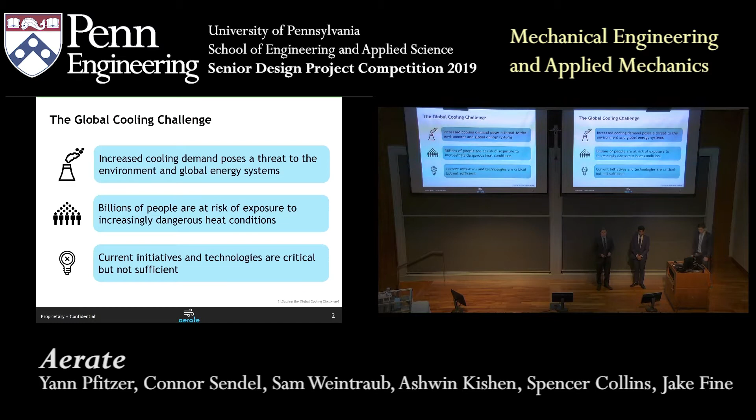Looking more specifically at the factors contributing to the increase in cooling demand, global temperatures across the world are rising, income is growing, urban populations are growing, populations in general are growing, and simply cooling requires a massive amount of energy.

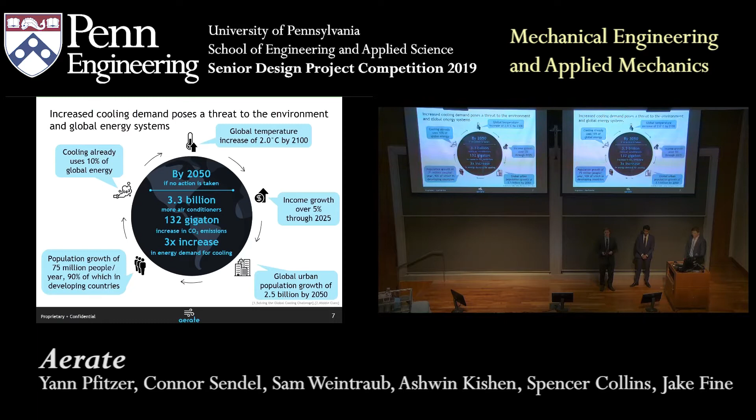What this means is if no action is taken by 2050, 3.3 billion new air conditioning units will produce an estimated 132 gigatons of CO2 emissions, resulting in a 3x increase in energy demand for cooling. To put this into perspective, this is the equivalent of adding 2 European Unions worth of energy consumption just to meet the increase in cooling demand.

This increase in cooling demand is happening in just a few countries, but the majority of growth is happening in India, which will see the introduction of 1 billion new air conditioners by 2050. Due to the massive growth potential, Aerate has decided to focus their efforts on this market.

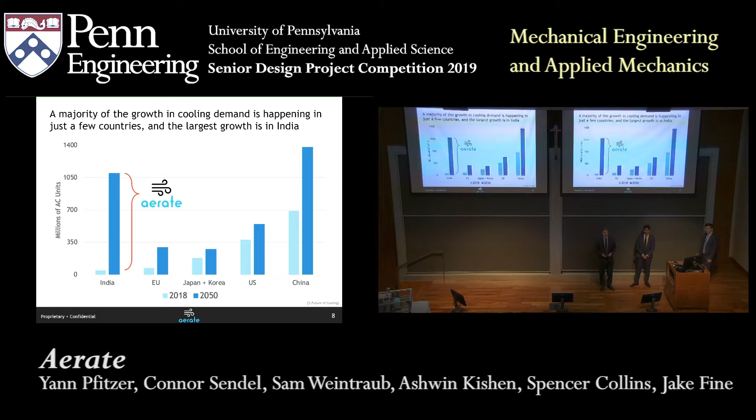Looking more specifically at the Indian market opportunity, currently only 7% of Indians own an air conditioner, but the ownership rate is rising annually. Additionally, 55 million Indians are entering the middle class each year, of which an air conditioner is a key quality of life purchase.

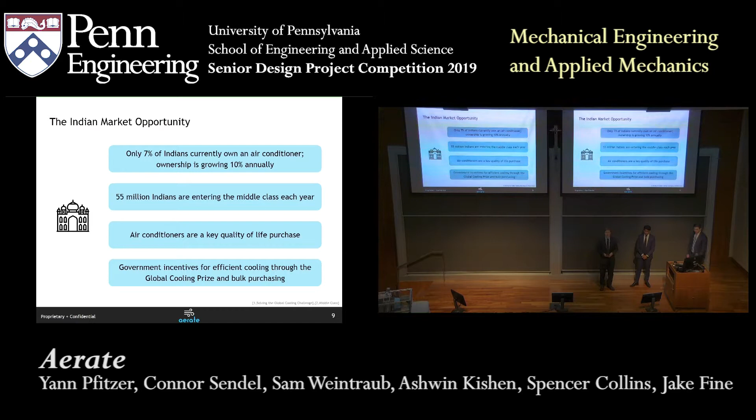Finally, the Indian government is beginning to incentivize the transition towards energy efficient cooling through bulk purchasing agreements and competitions such as the Global Cooling Prize. What this means is that in order to address the threat posed by the Global Cooling Challenge and reduce our energy consumption relative to today, a 5x increase in air conditioning efficiency is needed.

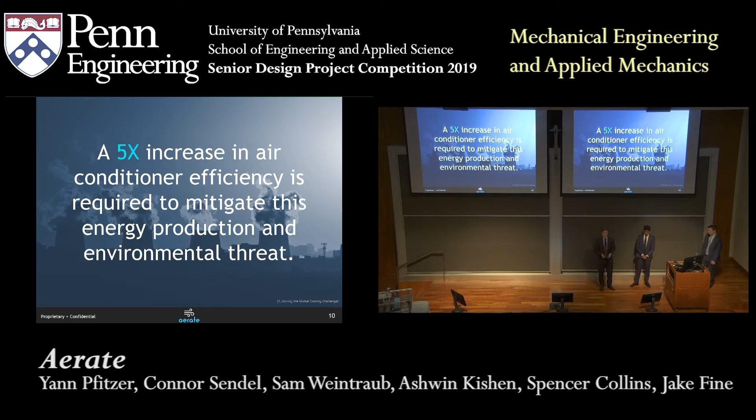The Global Cooling Prize is a competition sponsored by the Indian government and Richard Branson to promote the development of energy-efficient cooling technologies, and they have outlined a few key criteria. Performance, affordability, target output, and climate impact are all key considerations when developing a new air conditioning system.

Looking more specifically at the performance criterion, coefficient of performance, also known as COP, is a key metric used to evaluate the efficiency of an air conditioner. In order to address the global cooling challenge, we will need to achieve coefficients of performance greater than 5, compared to the current baseline of conventional air conditioners of approximately 1.06.

Now I'm going to hand it over to Ashwin, who's going to tell you a little bit more about how we're able to achieve this performance.

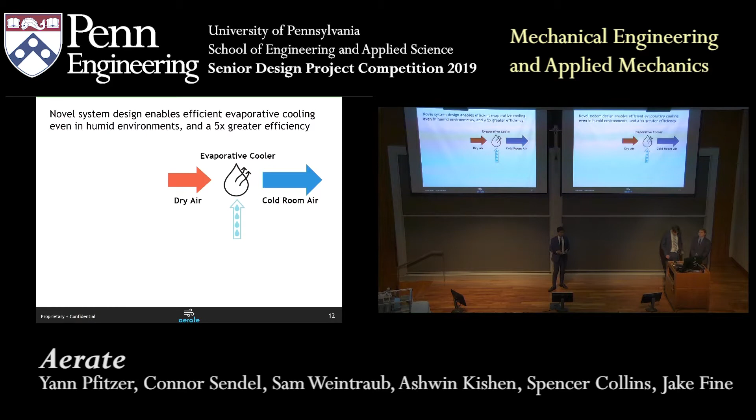Thank you, Sam. Evaporative cooling has been used around the world for thousands of years. It's a very simple and efficient technology. You evaporate a small amount of water into dry air, and this cools it down. Despite its efficiency, this process has an issue: it only works with dry air, which is no good for humid environments like India.

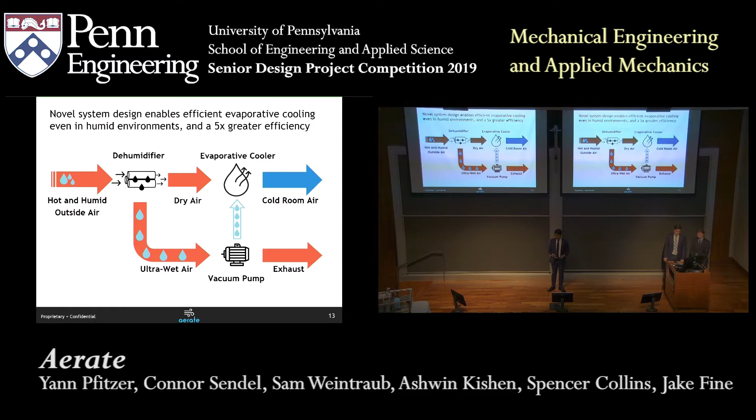Aerate introduces a novel membrane dehumidifier in front of our evaporative cooler. It's able to dehumidify air more efficiently than anything available on the market today, and thus we can cool anywhere. This is a system we have a patent application pending on.

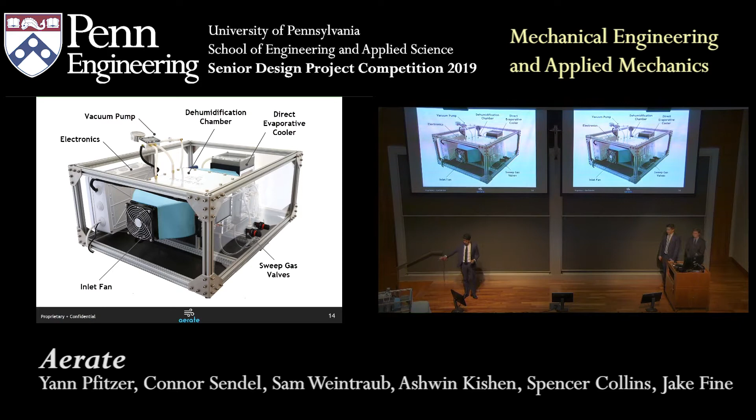So our real system actually looks pretty similar to what we have on the block diagram. You have a dehumidification chamber linked directly to our evaporative cooler, and this whole process is run by a vacuum pump. So we spent most of our engineering effort on the dehumidification chamber.

Basically, you take in hot and humid outside air and it passes across a membrane. This membrane is extremely permeable to water and selective against air. The process is driven by a vacuum pump that is literally sucking the water out of the air.

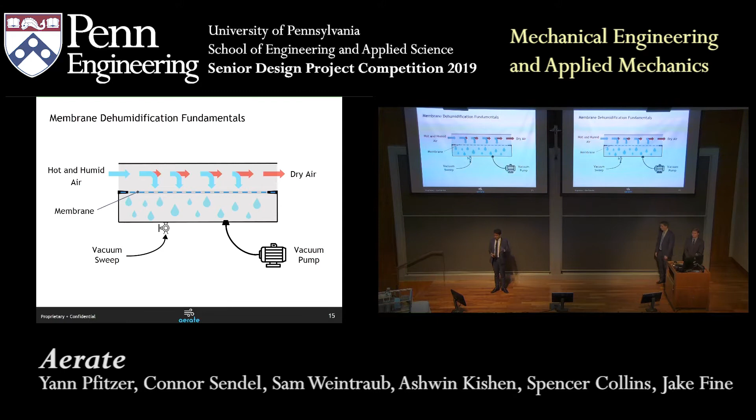To mechanically assist this process, we introduce a vacuum sweep gas. It's a small amount of outside air that is flowed into the vacuum to push the water out once it crosses the membrane. This process is well described by the solid diffusion separation model of membrane transport.

The flux of water across the membrane is proportional to a permeability coefficient and the difference in partial pressure across the membrane. So we took this equation and applied it in a few different lights.

From a thermodynamics lens, we characterized the vacuum work and potential efficiency gains of our system. From a fluid dynamics perspective, we characterized the sweep gas requirements and the residence time within the system. And from a membrane transport perspective, we characterized the actual selectivity and permeability of our real membranes.

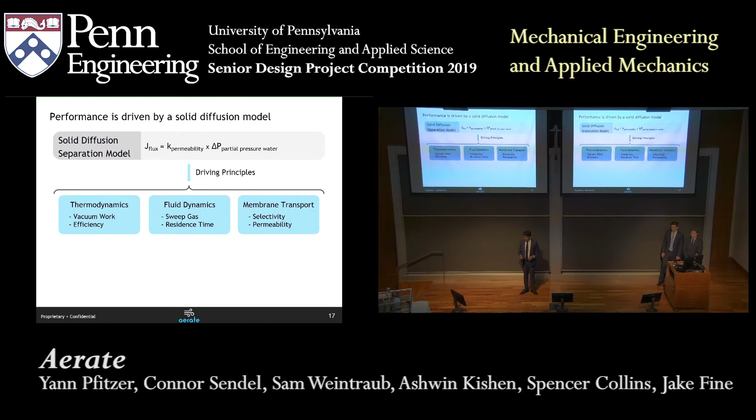We took those two characterizations and used them to try to get closer and closer to the theoretical efficiencies of our thermodynamics calculation. Based on this analysis, we identified a few trade-offs within our system, including dehumidification versus flow rate, and vacuum work versus sweep rate. An example of one of these trade-offs can be seen above.

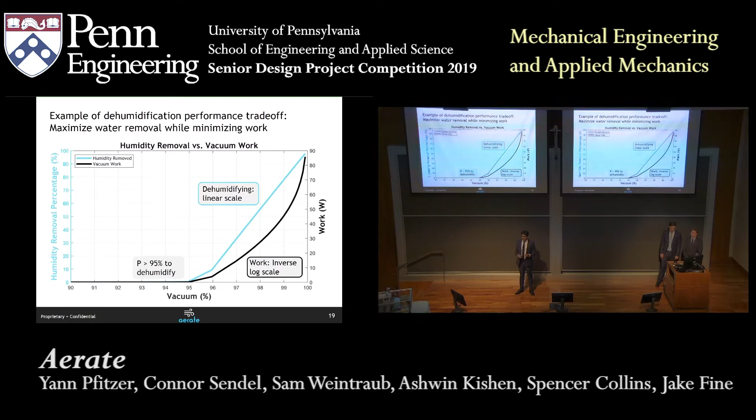So the percentage vacuum on the x-axis goes from 90 to 100%, 100% being full vacuum. On the left-hand side, you have the amount of humidity being removed, shown in blue, and this increases linearly after a minimum amount of 95% vacuum. However, the amount of work required to achieve that dehumidification, on the right-hand side, increases on an inverse log scale. So as you get more dehumidification, you're paying more and more work to achieve it, which is a trade-off for our system.

So we took our analysis and applied it to identifying the correct membrane material for us. We wanted high vapor permeability and high selectivity, which corresponds to the top right corner of the chart. We identified 3 membrane materials, Nafion, Pebax, and SPEEK, and tested 2 of them which are commercially available, identifying Nafion as the ideal material for us because of its extremely high selectivity.

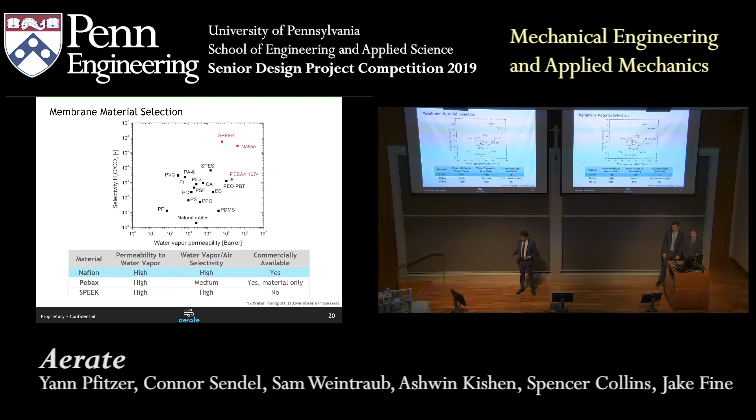Based on these designs, we came to the final membrane dehumidification chamber, and I'm going to talk about 4 different aspects of it today. Our system has a modular design with 5 identical stacked modules. Each module consists of a feed chamber and a vacuum chamber separated by a membrane. We use this design to ease manufacturability. Our system has 95 total parts, but only 11 unique ones between them, a very low number.

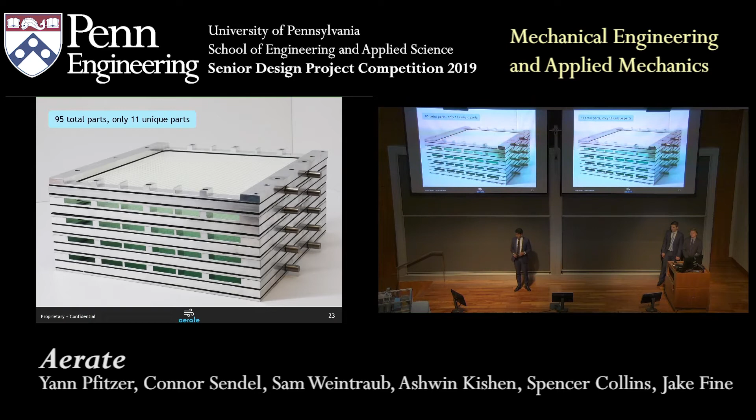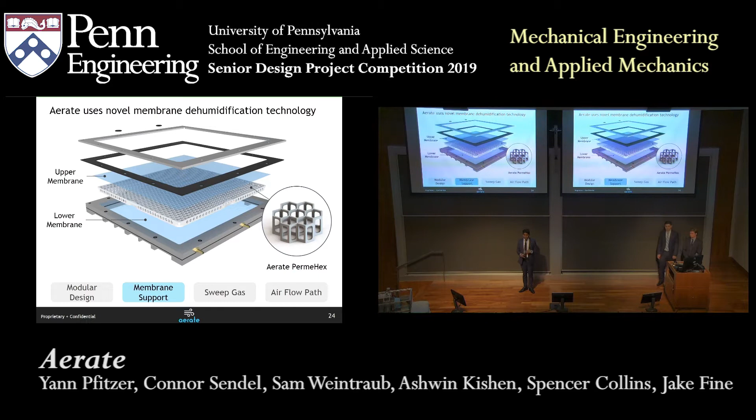Diving deeper into a single module, we have a membrane support, which is used to evenly support the membrane without pinching or puncturing. This required many iterations before we came to the Aerate PermeHex, a hex cell structure with openings in between to allow sweep gas and humidity to pass through the membrane and out through the vacuum pump. This is the membrane layer under vacuum, and you can see the hex structure actually at work.

Within our system, as mentioned before, sweep gas is extremely important. The way we're able to incorporate it is by using a manifold that introduces sweep gas into all the layers in parallel, which then passes across to the vacuum pump. This is important to shear the water off the membrane, because our system uses an interesting membrane that requires this component. It's extremely novel.

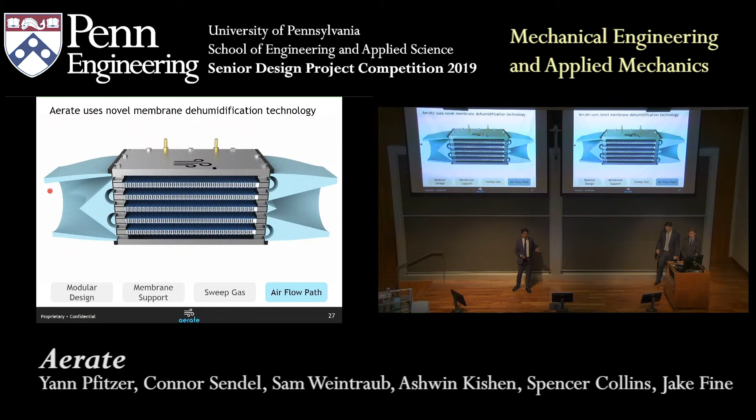Going back to the feed side, it's important to maximize the residence time on the feed side and to maximize the flow rate through the system, and these are actually in contradiction. The way we were able to optimize this was by creating an S-shaped flow path through the system, where each ounce of air is passed across multiple membrane layers.

Thank you. I'm going to hand it back to Connor to talk about the rest of our system.

Thanks, Ashwin. So of course we didn't get to this final design that you see in front of you overnight. It's actually the result of multiple iterations to characterize different items of our system. We started out with an extremely small prototype designed to characterize our membrane performance under vacuum and really understand what's happening with the membrane separation process that Ashwin described. Then we moved to a system that was about 20 times bigger in order to understand if our process would scale and test our manufacturing methods.

Finally, we moved on to the prototype you see in front of you, which was another 5 times bigger than that system and is ultimately about 2/3 the size of our target prototype. Now I'm going to spend a little bit of time talking about the performance of our system. Here you see a characteristic example of our system at work.

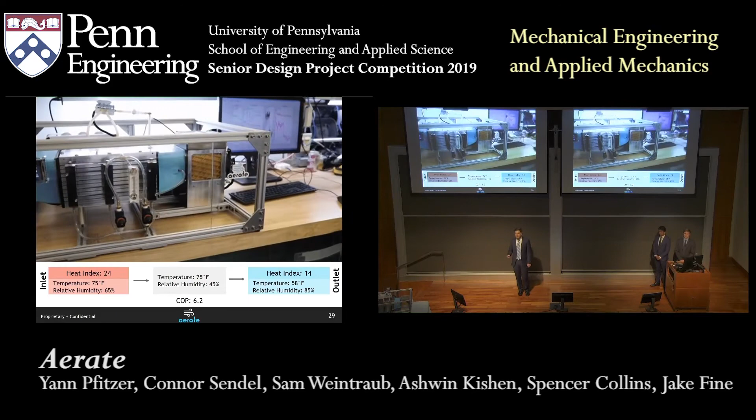Here we have air entering from our environmental chamber at 75 degrees Fahrenheit and 65% humidity. After the air exits the dehumidification chamber that Ashwin described, that drops down to 45% relative humidity, allowing us to cool it in the evaporative cooler all the way down to a chilly 58 degrees Fahrenheit. Overall, we see a move from a heat index of 24 all the way down to a heat index of 14, at an extremely efficient COP of 6.2, substantially higher than the baseline of 1.06 and our target of 5.1.

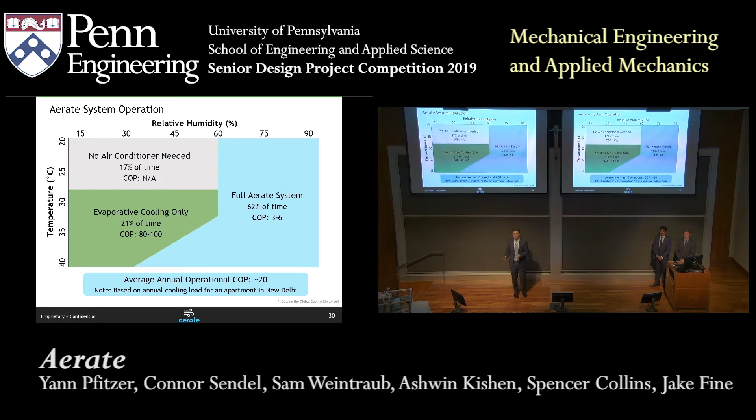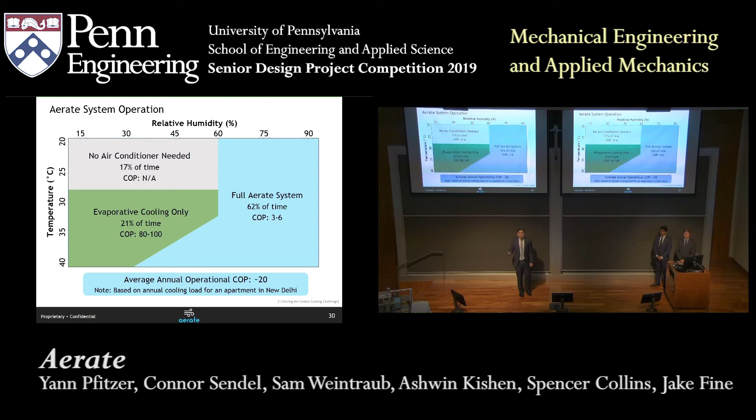But when we extrapolate these results to a full year of cooling demand, we see an even brighter picture. What you see here is a full year of cooling demand in our target market in New Delhi, India. Essentially, because of our system's unique ability to decouple dehumidification and cooling performance, when it's extremely hot but not very humid outside, we can take advantage of running only our evaporative cooler, achieving COPs of up to 100. That happens about 20% of the year. Taking this into account, over a full year, we expect an average annual operational COP of up to 20, almost 20 times higher than a baseline conventional air conditioner.

This also leads to substantial cost savings for users of Aerate, as the unit simply uses less power. Over our forecasted 10-year lifespan of an Aerate air conditioner, an average user can expect to save up to $1,000 in power costs relative to a conventional air conditioner, which is a massive value proposition.

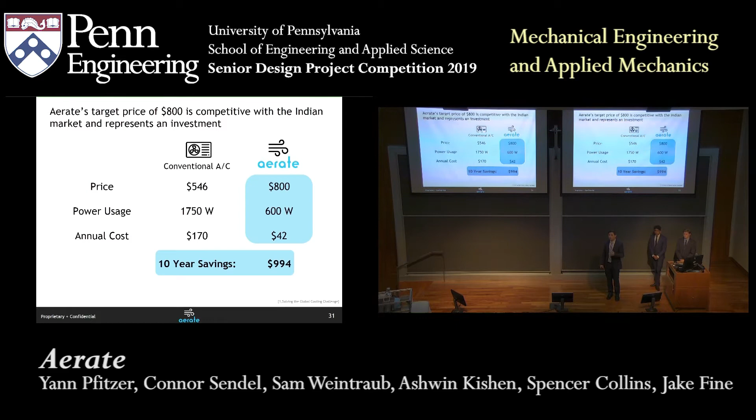Now, I've talked a lot about the great parts of Aerate, but we also have work cut out for us moving forward. There's two big things we want to focus on. First, we want to boost the flow rate through our system, allowing us to deliver more cooling performance and cool bigger spaces.

The second thing we want to do is decrease our sweep gas residence time. You could think of this as increasing the effectiveness of our sweep gas, the gas that's moving water out of the system. By decreasing the time any given molecule of sweep gas spends in the system, we can more efficiently carry that water vapor out, increasing the efficiency of our dehumidifier and of the system as a whole.

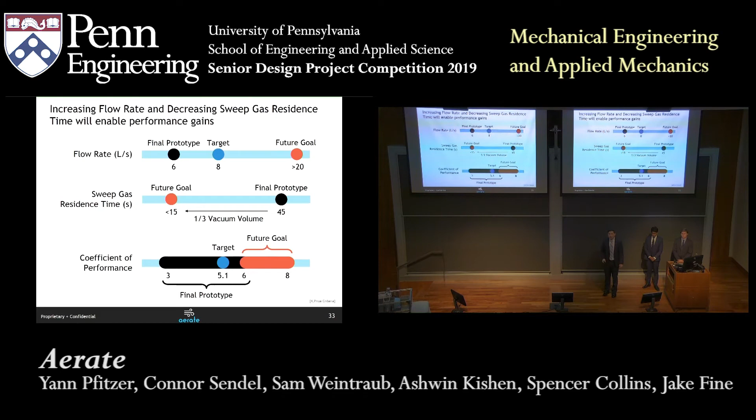We believe these changes will take us from our current operating regime of around a COP of 3 to 6, to an operating regime around 6 to 8, so that in any conditions we're exceeding our target COP of 5.1 when the full system is running, which will further boost the 20x gains we're seeing.

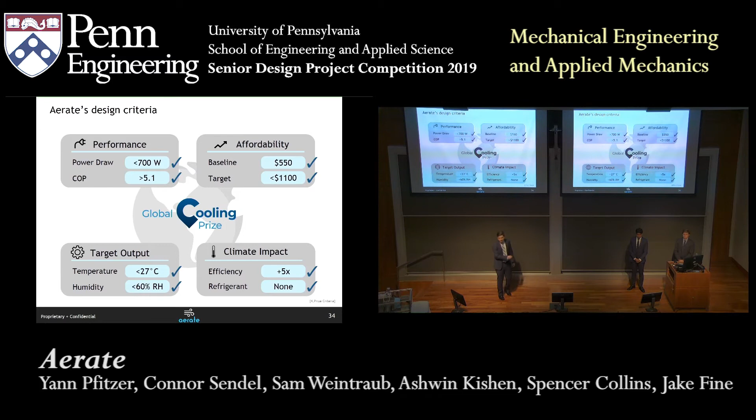So we believe that the prototype in front of you, with small changes, meets all the criteria that we laid out at the beginning of this presentation. We'd specifically like to highlight meeting our performance criteria that Sam called out earlier.

We've spent a ton of time on this, and we're happy to say that Aerate is the world's first membrane air conditioner designed to cool a full house or apartment. As a result, we strongly believe this air conditioner best meets the needs of the Indian market on the basis of cost, cooling performance, design for humidity, and climate impact.

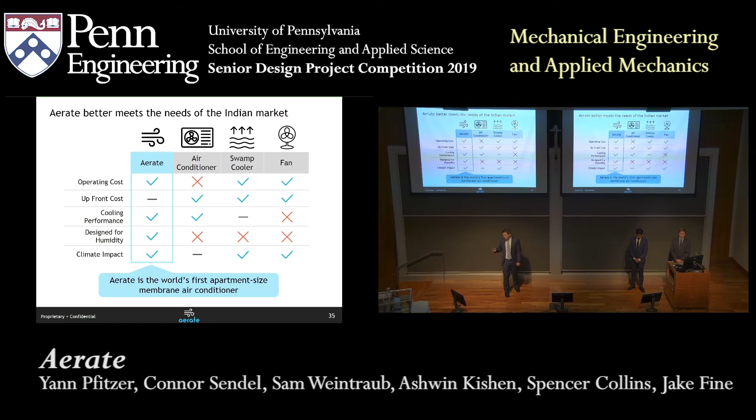Though we've spent a ton of time on this over the past semester, we're excited to continue working on it, and want to give you a sneak preview of what we're working towards. As we move from prototype to product, we're excited to iron out all the kinks and keep going on this project. We've already filed our provisional patent application.

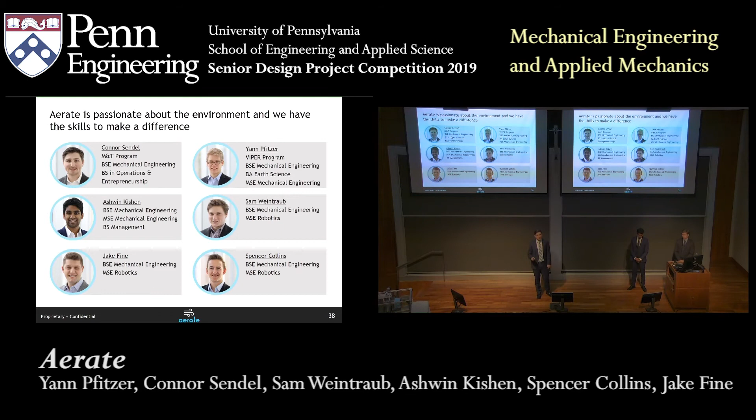Yeah, definitely. One of the great things about this is we are pulling water out, and the addition of a simple vacuum condenser, which is an existing solution, will allow our product to condense this water. It could be filtered and used to drink, or it could also be used directly in the evaporative cooler to further boost the efficiency of the system.

We plan to introduce a HEPA filter in front of the system. This is important because it filters out PM 2.5, the predominant chemical particulate in the air, which improves indoor air quality, something our customers really look for in any air conditioner. It also extends the lifespan of the membranes, which are designed to be pretty corrosion resistant anyway, but this just protects them further.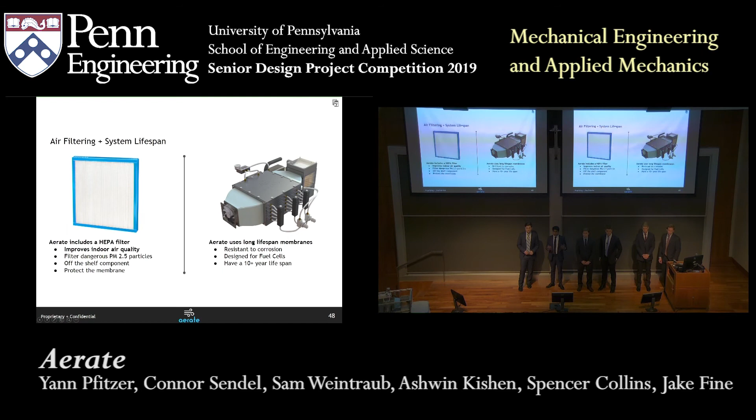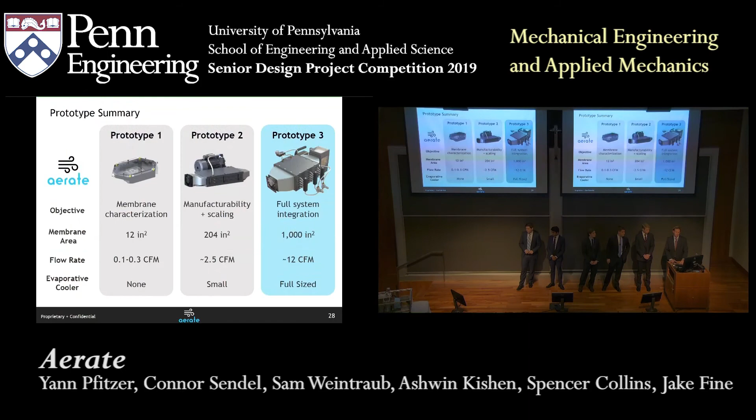Thanks for the presentation. Would you mind going back to the slide where you had the example? Yes. I don't have it listed, but in the end, does relative humidity increase?

So when you use this AC, humidity—in this iteration, we're using a direct evaporative cooler rather than an indirect evaporative cooler. The difference is that the cooled air coming out of the evaporative cooler in this iteration goes directly to the room. In the next version, we're planning to use an indirect evaporative cooler, which instead uses a heat exchanger with room air and exhausts the more humid air.

Because the bulk of our focus in this version was on the dehumidifier, we had to make some compromises in other areas. But moving forward we don't expect that problem, and we'll be able to independently control temperature and humidity of the room by mixing room air with the outgoing air. Over time, this means the humidity of the room will actually decrease, further boosting the efficiency of our system.

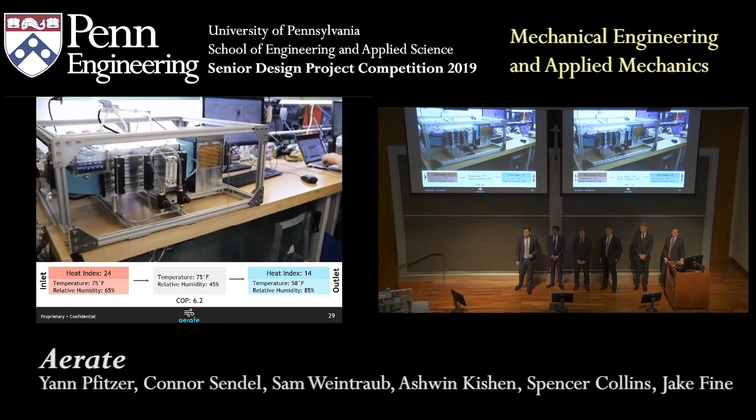Yeah, so that's including a 70% margin. So our expected COGS is about 30% of that, or $320.

I was wondering, what kind of pressure do you have to generate to pull this water through? What kind of maintenance does the user have to do on the vacuum?

Because we introduced a sweep gas, the pressure requirement is actually relatively low, and that has to do with the fact you can generate a partial pressure difference using a couple of different methodologies. In terms of generic maintenance, the most likely thing is replacing the HEPA filter every 2 to 3 years, which is in line with most air conditioners. We don't anticipate needing any maintenance on the vacuum pump, and the membranes have a 10-year lifespan.